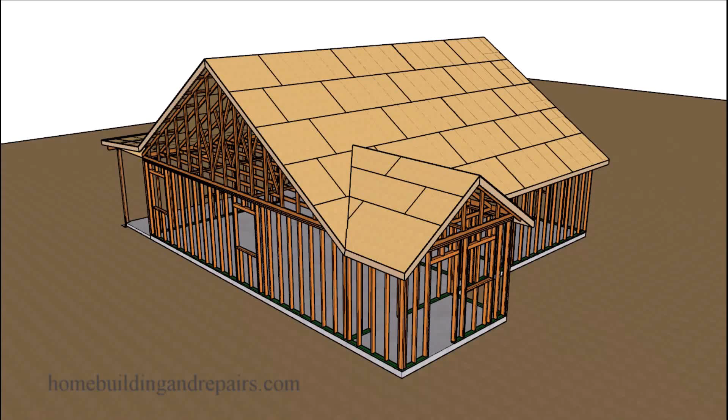In this video, I will provide you with a couple of different ways to calculate the wall framing stud measurements for a chimney. And for the most part, this information should apply to both new construction and remodeling or adding a chimney to your house.

So the first thing I want to point out is that the wall framing studs are usually going to sit on top of a wall framing plate, and the thickness of that wall framing plate will need to be calculated into your measurements, along with the wall's top framing plates and anything else you're going to be adding to the wall framing.

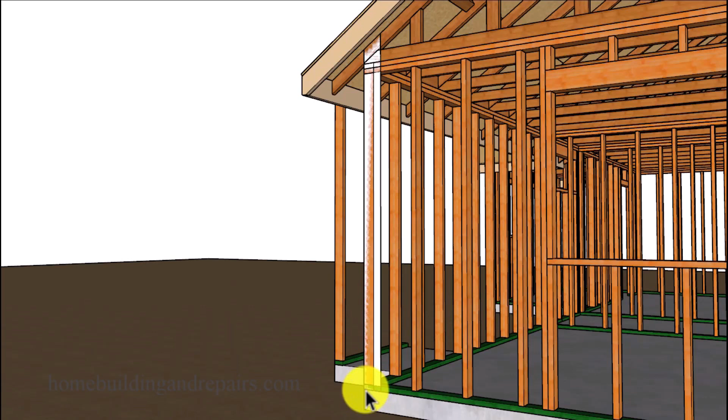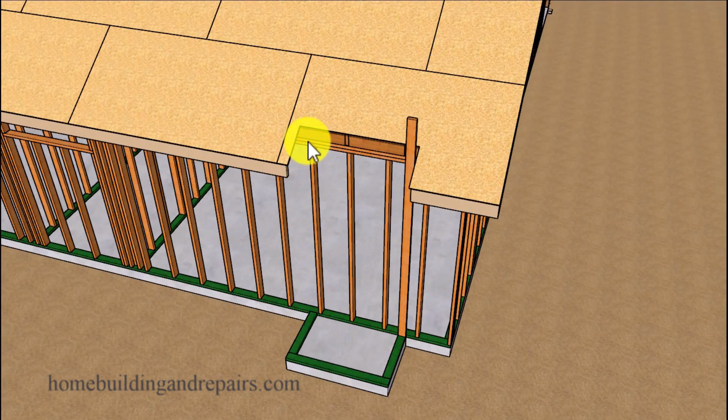So with that said, let's go ahead and take a look at a measurement you could take here from either the top of the building foundation or the top of the wall framing plate to the bottom of the sheathing, and then add for the thickness of the sheathing as one way to get a starter measurement. However, I don't think that's going to be necessary because you're going to be able to measure it from the top of the bottom framing plate to here, and then do some simple math to calculate the rest of the wall framing chimney stud.

So here you can see where we've just placed a stud here. You can use your measuring tape. You don't need to put the stud here, and then you're going to mark the top point where the wall framing stud meets the roof sheathing. So not too difficult there.

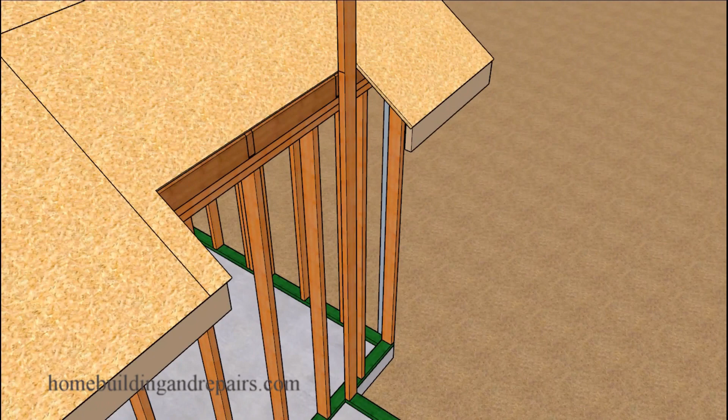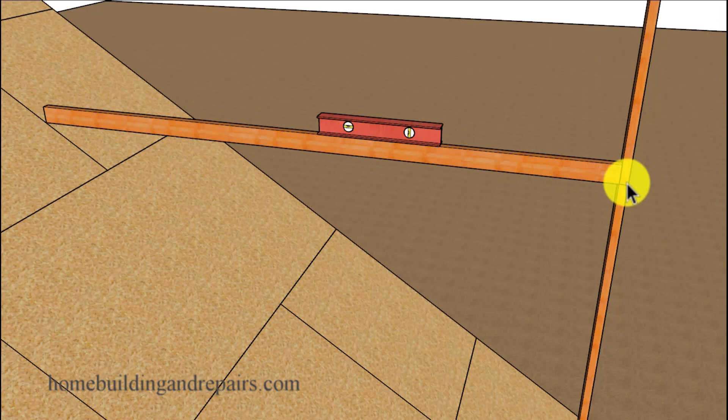The next step will be to either use a simple math formula to figure this height, or grab a 10-foot 2x4 and then place this end on top of the roof sheathing. And then once it is level, you can go ahead and mark the bottom. Remember, you don't want to be marking the top, you want to mark the bottom.

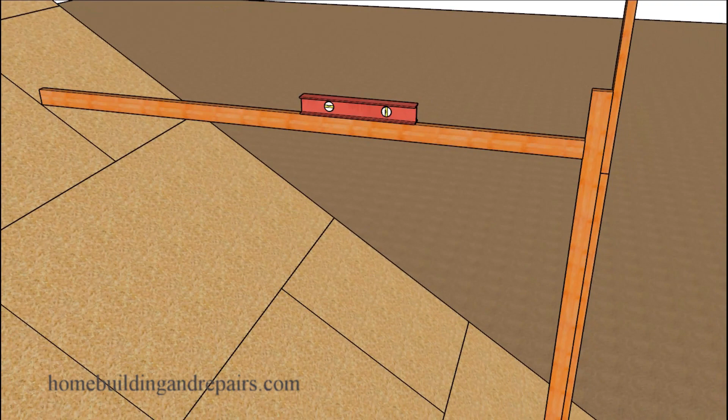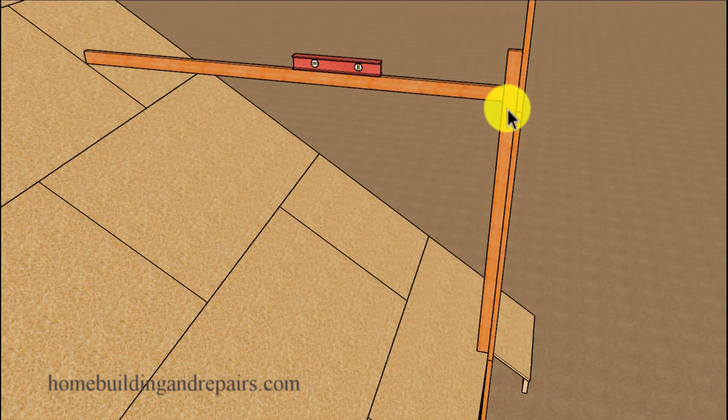Next up, let's take a look at another problem you might have. In our example for our framing, we are going to be building a wall on top of the roof. So the 10-foot measurement is going to need to come from this point here and not this point here. So keep this in mind. It's not just this point here.

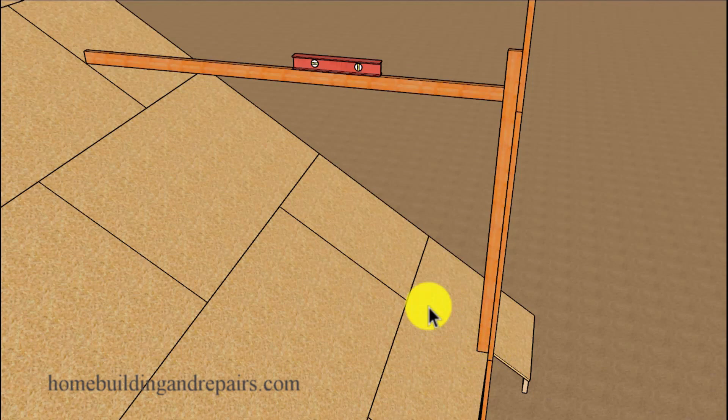It's going to be the measurement off of the top of the roof sheathing, where the farthest point of the chimney on this side is going to intersect with the roof sheathing. Not always going to be this point right here. So let's go ahead and put our mark in there. And this will make a little more sense when I provide you with a final example of what the chimney is going to look like.

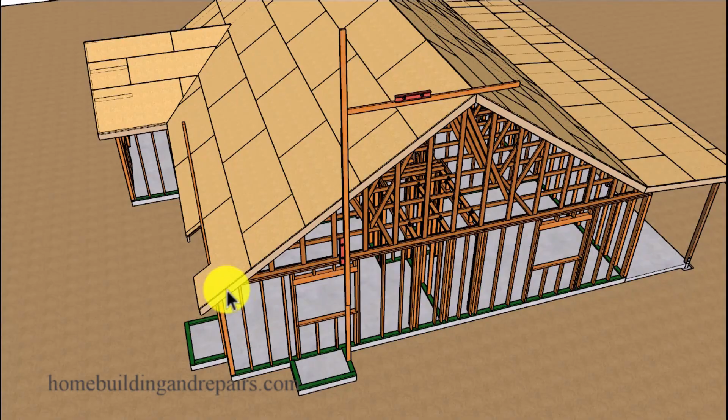In our next example, we will put the chimney on the other side of the house and go ahead and break out our long stud and our level with our straight edge. And you can always use this method here to calculate the height over here, especially on an existing house. So we're going to need to plumb this board in both directions so that it is vertical. We're going to be using that for our measurement.

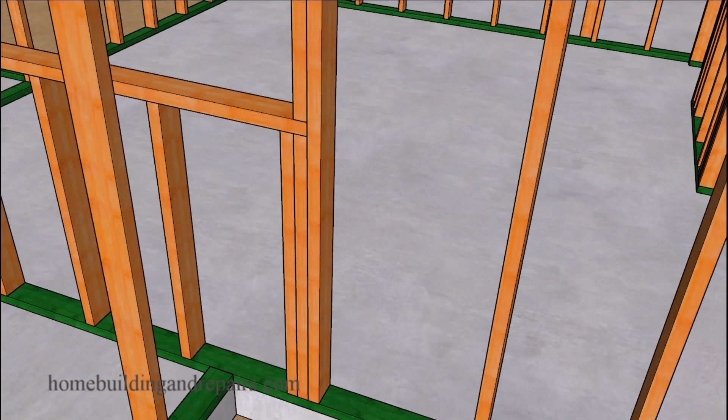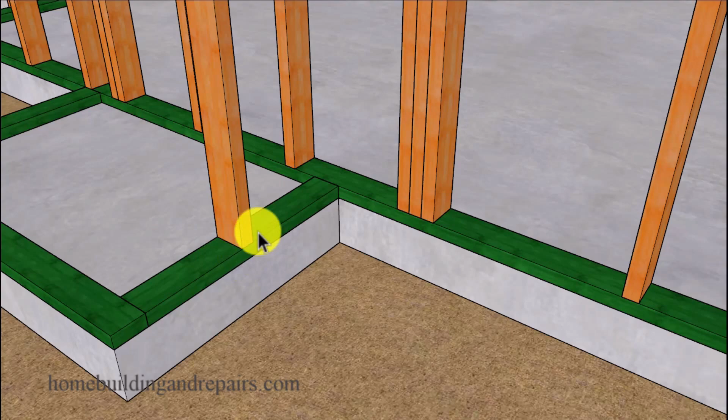Or you could always measure from here to the fascia board on the top and transfer that measurement to the bottom. And you don't need to be right on the money here. I think as long as you're within an inch, you're going to be okay. I'm also nailing two 2x4s together here to provide those of you with another option if you can't find lumber long enough to calculate the chimney stud height.

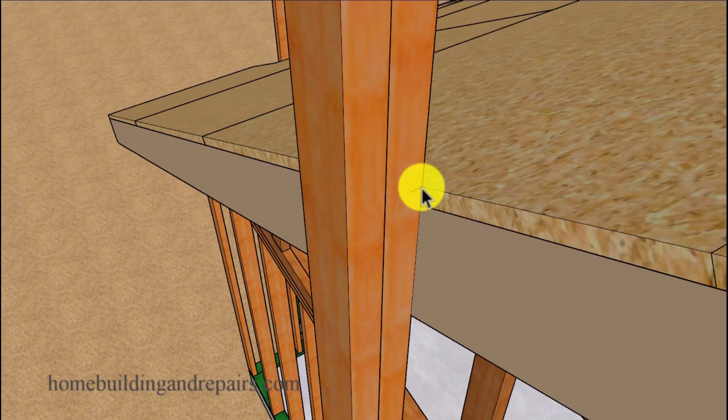And again, we are going to make a mark on the wall framing stud even with the top of the sheathing. And I guess now would be a good time to point out that if you are going to get this as close as you possibly need to the minimum chimney height, then make sure that you take into calculation your roofing materials and anything else that is going to be on top of the roof that could create a problem for this measurement. Now in this example here, we do not need to go back 10 feet. We are at the top of the ridge.

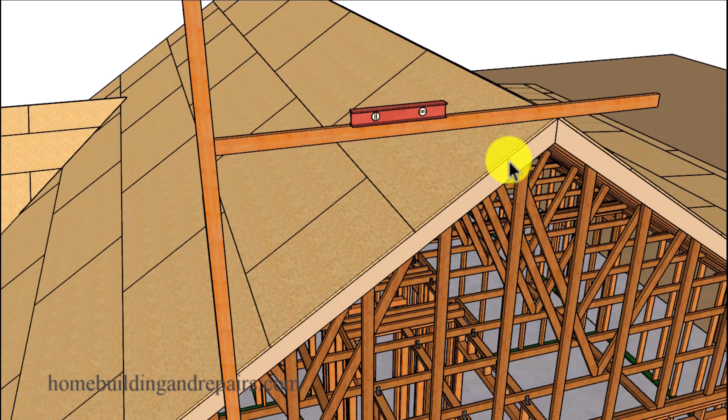However, if you are going to move the chimney over, keep in mind that you need a 3-foot minimum height for your chimney. And the 10-foot by 2-foot measurement that we're used to isn't going to do you any good here. 3 foot is the minimum height for a chimney.

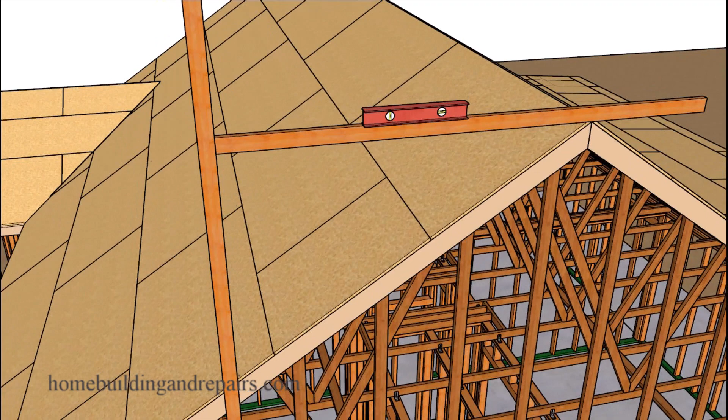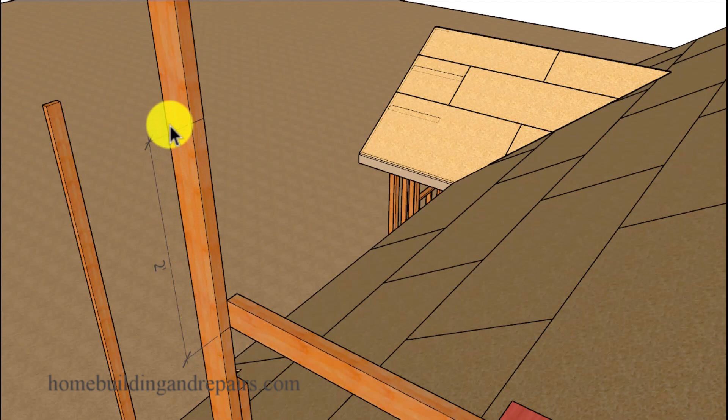And again, we are marking the bottom and not the top. Why am I saying this? Because while I was making this video, I marked the top of it. And you could end up making the same mistake. Try not to do that. Make sure that you're measuring off of the correct spot. And of course, the minimum measurement we're going to need to add will be 2 foot. And the same measurement will apply to the other chimney we were building.

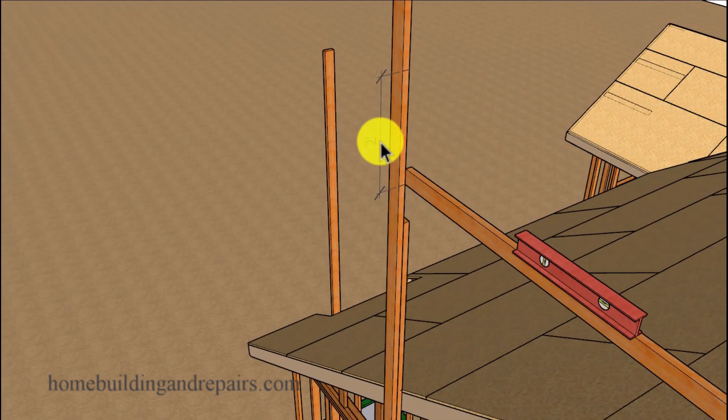Now, just to be on the safe side, keep in mind these are minimum measurements. You might want to make it a little larger. And that's what I did when building the 2 chimneys. Instead of going with 24 inches, I made this measurement 30 inches. So 30 inches from this point here to the top of the chimney wall framing studs. And this measurement will work for all of the framing studs as long as you're dealing with a level concrete pad or a level foundation.

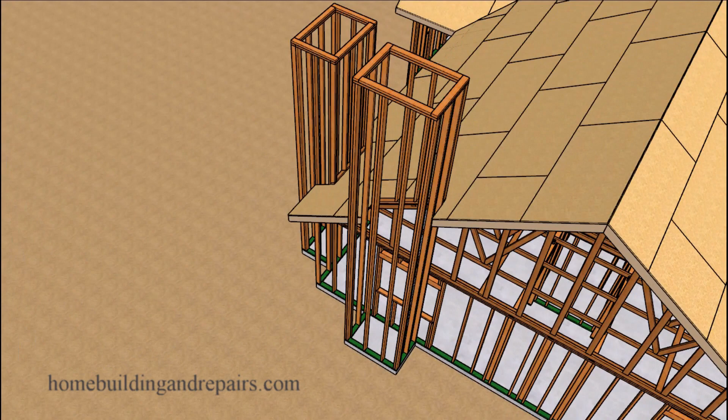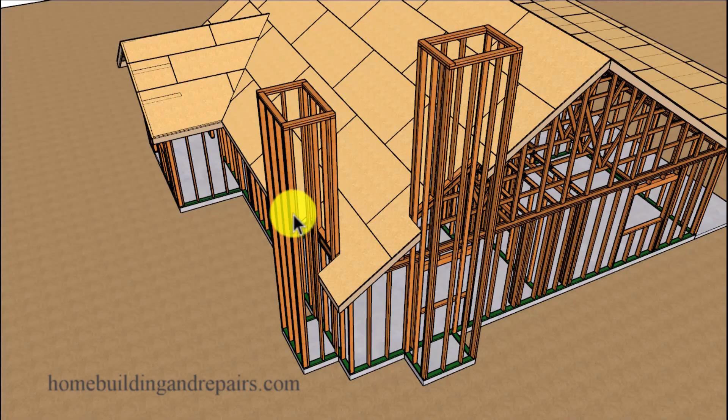And let's go ahead and wrap this video up by taking a look at the completed wall framing for our chimneys. And as you notice, this one here is a little taller than this one here. The farther you go up the roof, the taller the chimney is going to be. So keep this in mind if you're not interested in building a huge chimney when designing your project. Try to put them at the bottom of the roof. And this is probably the most common location you're going to find for a chimney, especially for home builders who know what they're doing.

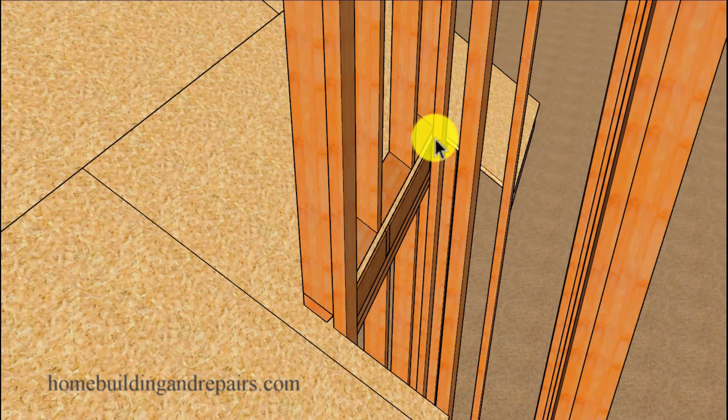Now here's the example of what I was talking about. We're not going to be coming off of this mark here. We're going to need to add 3.5 inches to it. This will be the point we're going to be coming off of. The farthest point of the chimney facing the slope of the roof, or the slope of the roof that we're going to be getting our measurements from.

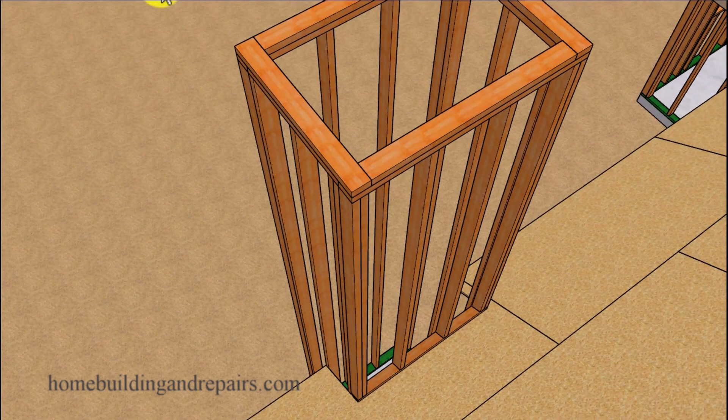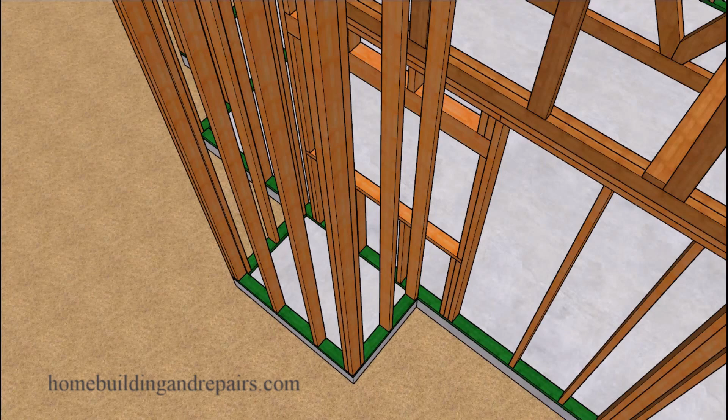And try to keep in mind this video is just on calculating the wall framing stud heights. And there's usually a little more work that will need to be done to these fireplace chimneys. And I think I'm going to create a follow-up video. However, I don't know when I'm going to do it. But I'll try to create a follow-up video on how you can calculate the height of the chimney wall framing by the components you're going to use to assemble a prefabricated metal fireplace.